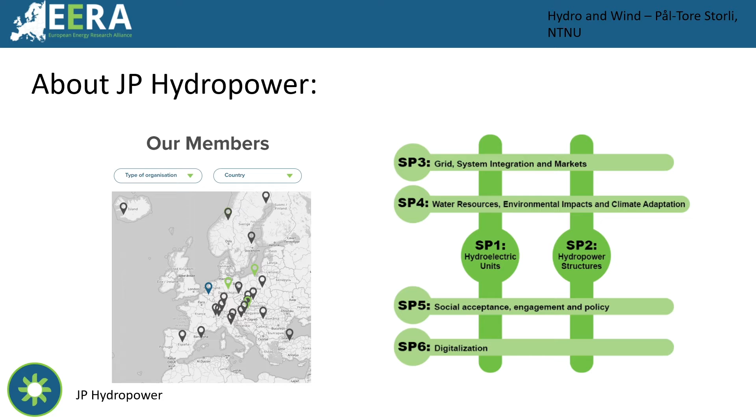We have a lot of members throughout entire Europe. Some countries are still lacking. We're working on that, but Brexit had its effect and other things as well. But we are still a joint program which is expanding.

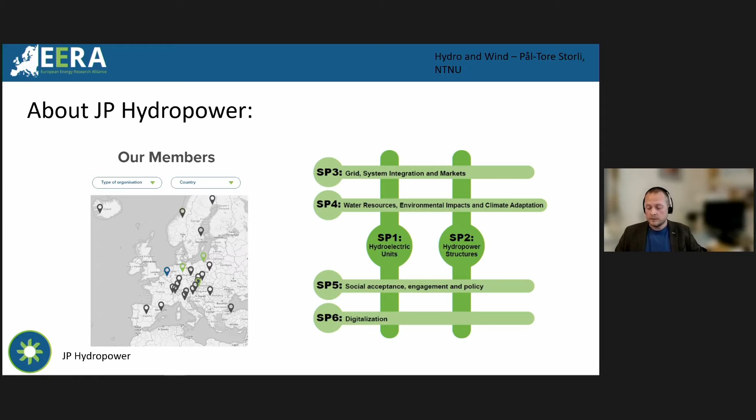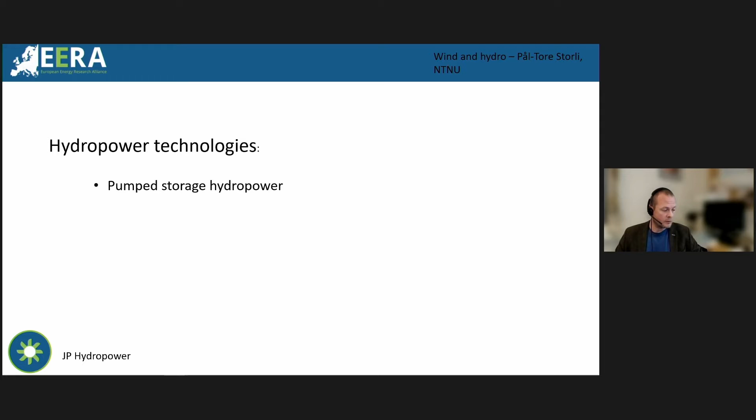Hydropower technologies is actually quite diverse, and we have already heard about pumped storage hydropower. And the good thing about pumped storage hydropower is that it's able to store excess electrical energy as potential energy, actually to a vast extent, both regarding power and also energy storage.

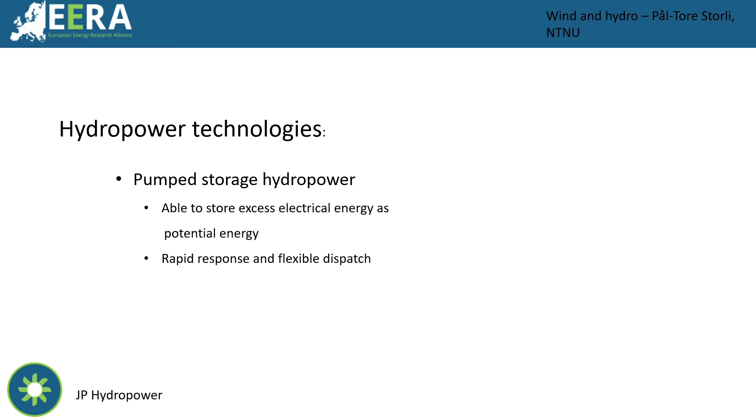Of course, we need to get this electricity back, and the response of pumped storage is very rapid, and you can have a quite flexible dispatch so that you're able to meet both consumer and producer volatility to find the balance.

For reservoir hydropower, or some refer to it as storage hydropower, we don't have the possibility of taking excess electrical energy and storing it as potential energy, but it still has this rapid response and flexible dispatch, at least if the outlet of the power plant is not the river. In the case of the latter, there are more restrictions which are imposed on the power plant, but still there are a lot of reservoir hydropower plants available for rapid response and flexible dispatch.

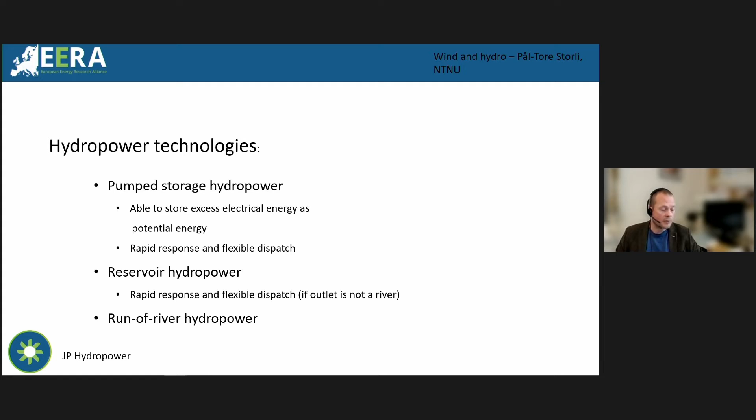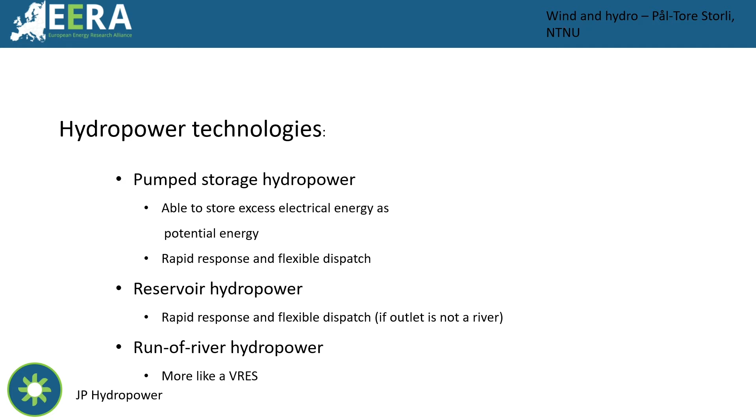The last type of technology is what we know as run-of-river hydropower. And that has more like volatile renewable energy source characteristics. You are able to produce whatever the flow in the river is, basically. And these two first ones here, the pumped storage hydropower and reservoir hydropower, are very well equipped to complementing the characteristics of wind energy.

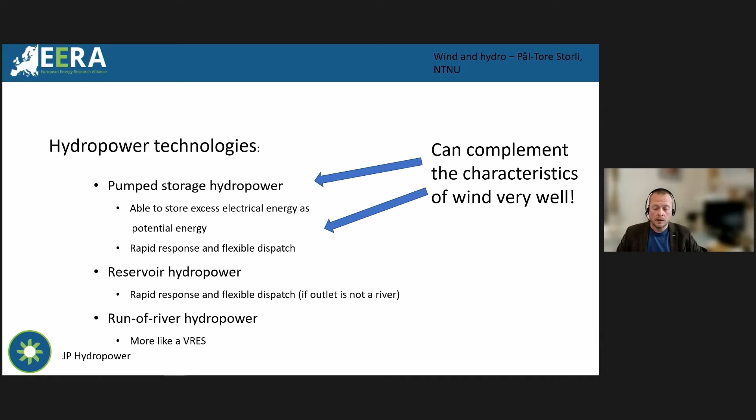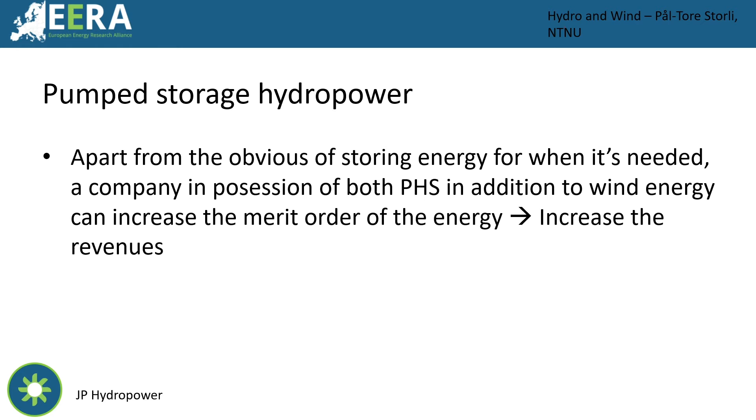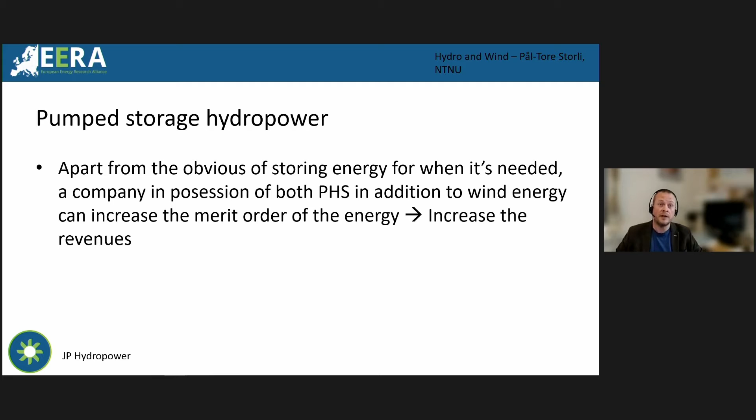Let's talk about pumped storage hydropower first. So we can store a lot of energy when it's needed. It can also be a direct revenue increase benefit of having pumped storage available, because in case of a company owning some wind power production farm, also having the possibility of owning a pumped storage power plant, this will in turn change the merit order of the wind energy. So we are shifting the value of the wind energy as well, from being very volatile to not so volatile. And this will actually increase the revenues. So this is something that has been seen as a consequence of combining pumped storage hydropower and wind.

And I won't discuss increase of revenues in this case because it's a very small island, so there's not a market per se. But it shows that the characteristics of pumped hydro and wind are very complementary. So it enables to have a balance between production and consumption in at least a small island. But this is basically the same feature in larger systems as well.

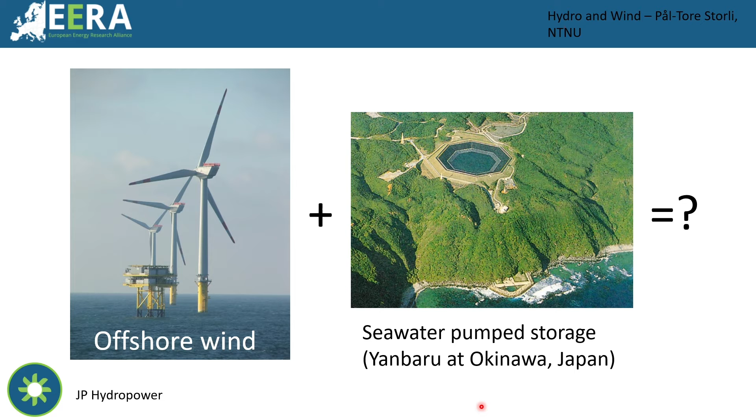I have to admit that this Yanbaru pumped storage power plant has been decommissioned. But as far as I know, this is not due to technical issues. It's due to the fact that the projections on electrical consumption didn't meet the expectations. So they struggled to have a net income for this power plant. But combining offshore wind and seawater pumped storage might at many locations be a really interesting thing to look into.

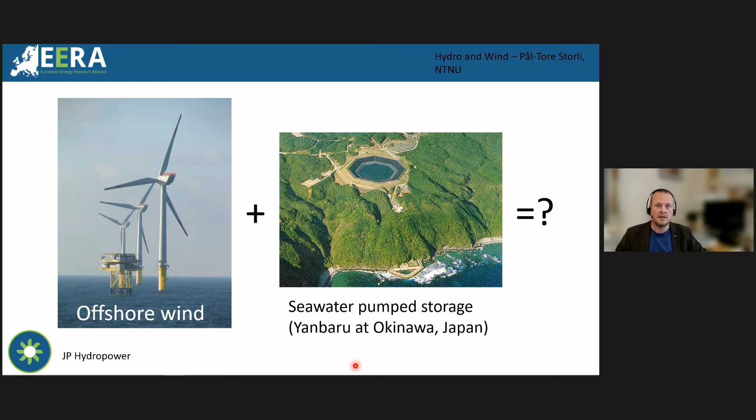And teasing you about my next slide, I have to admit that being a Norwegian, I'm sort of prone to show you the Norwegian perspective. But in the backdrop of being member of the joint program on hydropower, I don't think that is unfair either, because hydropower in many aspects is very much mapped with Norwegian flags. We have 50% of all reservoir capacity in Europe, and we have close to 100% electricity provided by hydropower. So even if I put on the Norwegian hat now, I don't think that's unfair to the general discussion.

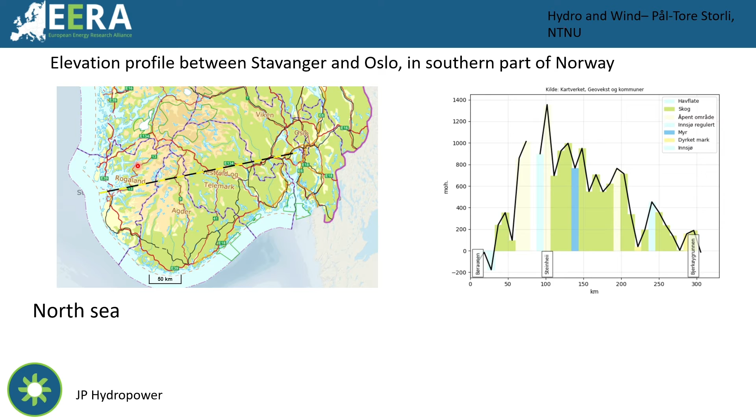So you have locations in Norway where you have seawater and you have very high mountains very close to the fjords, basically. This could provide very efficient pumped storage of seawater.

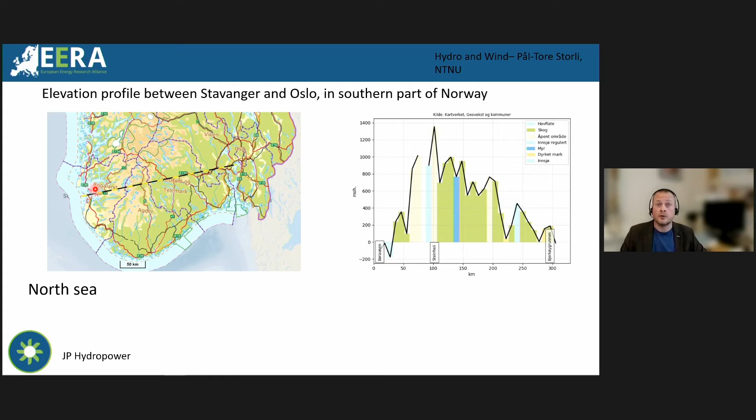Okay, do we have any wind resources in Norway? Well, I don't think any Norwegian politician would promote onshore wind power these days. We had a relatively large development of onshore wind, which generated a lot of fuss, basically. But offshore, I think, is very much on the table.

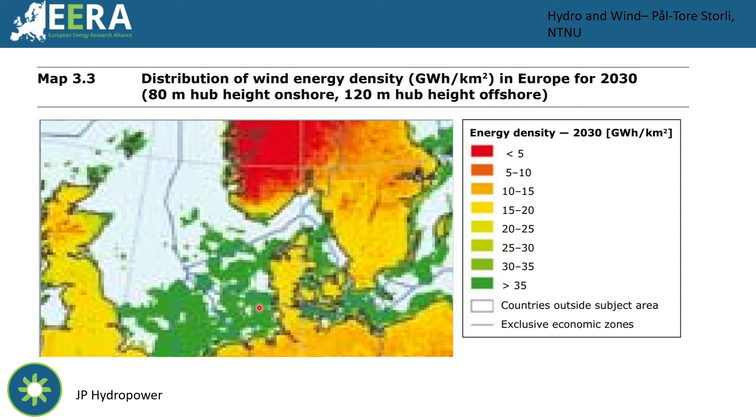And I guess you have seen this figure. It's a figure from one of the EU reports showing that there is a very high potential for wind power in the North Sea region. And I'm thinking, why not investigate if pumped seawater at these very high locations in southern parts of Norway, strategically close to the continental Europe system, could be a really nice way of facilitating further development.

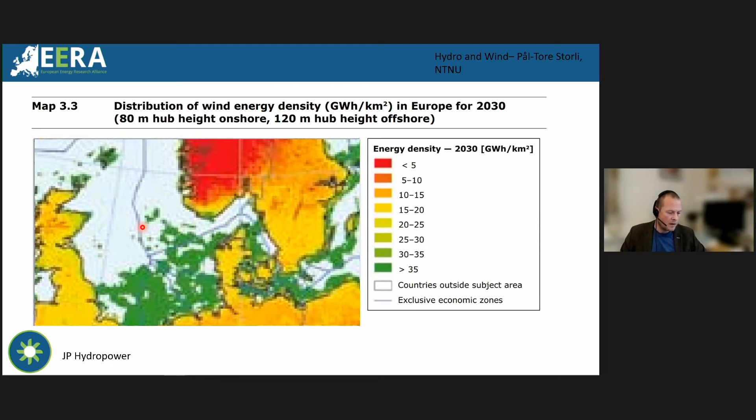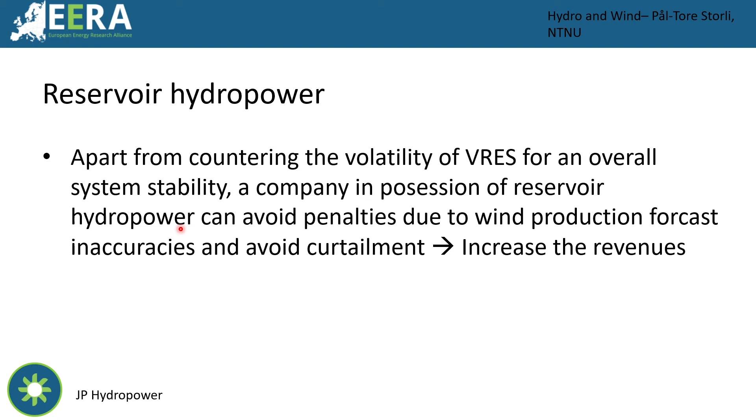Even if you don't consider pumped seawater storage, we have a lot of reservoir hydropower in southern parts of Norway. And talking about reservoir hydropower, even if you're not able to store excess electrical energy, you are able to, through this rapid response and flexible dispatch capabilities of reservoir hydropower, match the characteristics of wind power still, especially in a large system as the Norwegian.

And I know actually that there are companies who are avoiding penalties due to inaccuracies on wind weather forecasts by having reservoir hydropower as sort of the backup for matching their obligation to the market. So this can also be a very, very good way of increasing the revenues, basically by avoiding penalties when you are producing power into the market.

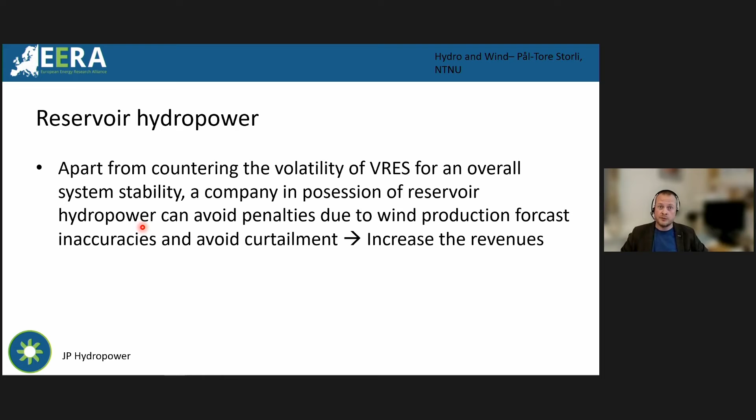And this is an intra-corporation aspect. If you have both wind and hydro, you can do this. But you also, of course, see in the system price of different electrical energy systems that you have import and export of electrical power to the systems where the price is highest, and this is happening on a large scale

between Norway and Denmark. So here we can see that we have a large export from Norway to Denmark, and this is on a day-by-day basis. So typically in the night, when the system price in Denmark is low, the Norwegian system is importing power.

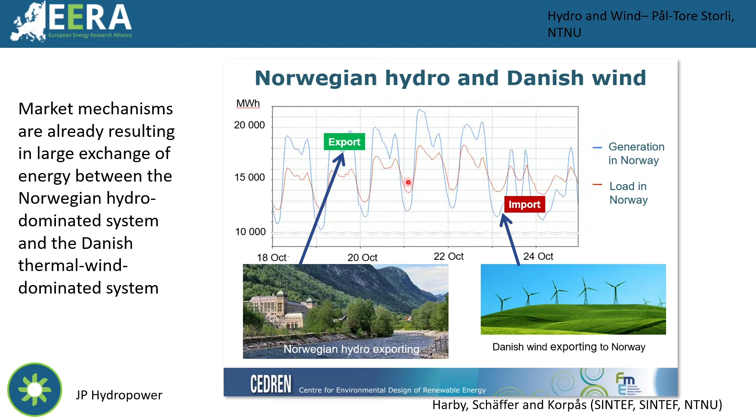And we have several cables going to other countries other than Denmark as well. We have several to the Netherlands and to Germany, and we are constructing cables to the UK now. So this will be a more prominent way of operating hydropower, by having the possibility of entering different markets.

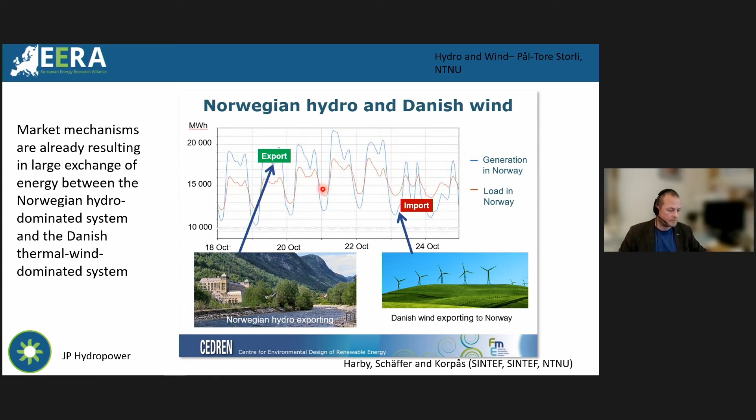Now, in fact, most of the large Norwegian reservoir hydropower plants are also located in the southern part of Norway. This is taken from Google Earth. I have put pins on all the power plants in this part of Norway. Now this is lock, stock, and barrel, from the smallest one to the biggest one. But we have many huge power plants here, which are actually operating between existing reservoirs.

So the outlet to a power plant is not a river; it's another reservoir, and there is a huge potential of adding more power to those power plants by just having more units. And a report made by SINTEF a few years back identifies this potential as 20 gigawatts.

And when I say gigawatts, of course, it's power, but also the duration of how this power can be provided is by far much better than any other storage technology existing today. So even if you can find battery storage plants which have the same power as typical hydropower plants, you can run a typical hydropower plant for much longer time than these battery power plants.

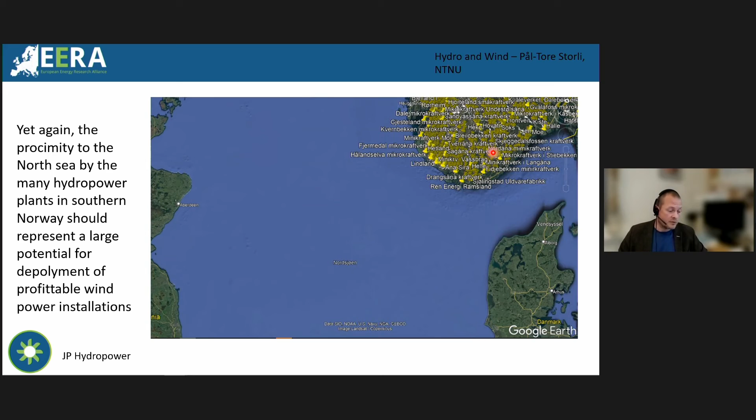Well, what are the barriers? We have already heard this mentioned several times in the previous presentation and questions. It's like NIMBY, not in my backyard. Everybody nods their head, but they don't want it close to their recreational areas and homes, etc. Increasing electricity prices is, of course, something the public basically doesn't want, and the politicians are also quite reluctant to be responsible for increasing the prices.

And actually today, one of the leaders of one of the parties on the winning side of the election here in Norway a couple of weeks ago, still a small party, but on the majority side, went out in media and said that he wanted a pause in the construction of this North Connect electrical cable between southern parts of Norway and the UK, because we have a situation in Norway now where the electricity prices are really high. There's been a dry summer and a dry autumn, and the reservoirs are quite low, leading to high prices.

And he was, of course, playing a political game on this. He doesn't want the prices to go up even higher, and says, okay, we should pause this cable. What he didn't mention is that such cables are also providing us at times very cheap electrical energy. So it was a sort of biased statement, I would say. But we find these barriers in all types of developments, and I'm guessing the wind power community knows of all these as well.

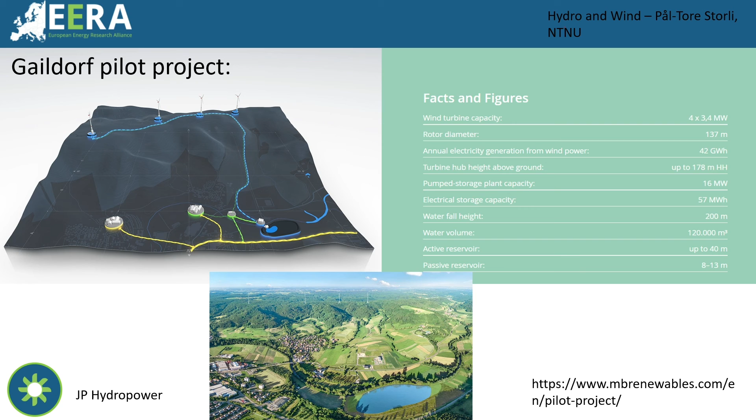No, I'm not aware of any cost estimates on that. So I would refer to the web page, which I had on my slide, or just Googling it. But it has come quite far in the construction phase, so I guess they have been able to find some net revenue mechanism for that project, and as all development projects, I'm guessing it's a sort of high cost to begin with, and as technology develops, it's expected that it will drop off, but I'm not sure of the level. Okay, no, that's fine. Thank you.

So Nikos, maybe we've got time for a question in Amsterdam. Yes, I think we have one question in the room. Hi there, Arno van Wingeren here, Fraunhofer IWES. I share also your love for hydropower. So yes, in principle, hydro and wind would be an excellent match, and we really love each other. If you look at the previous presentation, there's supposed to be 1.3 terawatt wind capacity being installed in Europe, if all things go to plan. Now, how much hydropower storage can you offer to match that kind of thing? Because it's nice to have the ping pong between Denmark and Norway, but we need quite a bit more of that.

It's a good question, and it's a question that points to the fact that it's sometimes difficult to agree on what is the important thing. Is power the important thing, or is energy storage the important thing? And I think both, basically. But at least this report I was referring to, in southern parts of Norway, without any new reservoirs being built, you can quite easily add 20 gigawatts to the existing power plants. How long the duration of this operation could be, I'm not sure. But the energy that could be provided is at least very high power for several hours, maybe days.